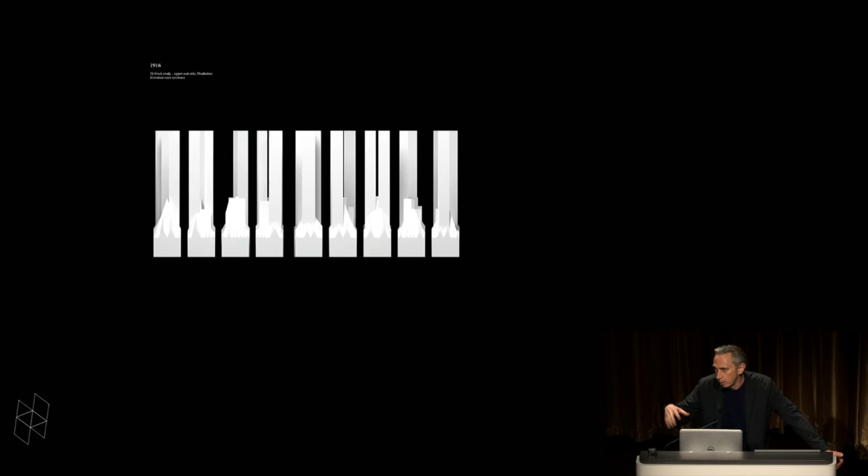In launching the Office for Urbanization, our mandate is to pursue applied design research projects with respect to questions of contemporary urbanization. And in so doing, it strikes us that there are really two primary questions.

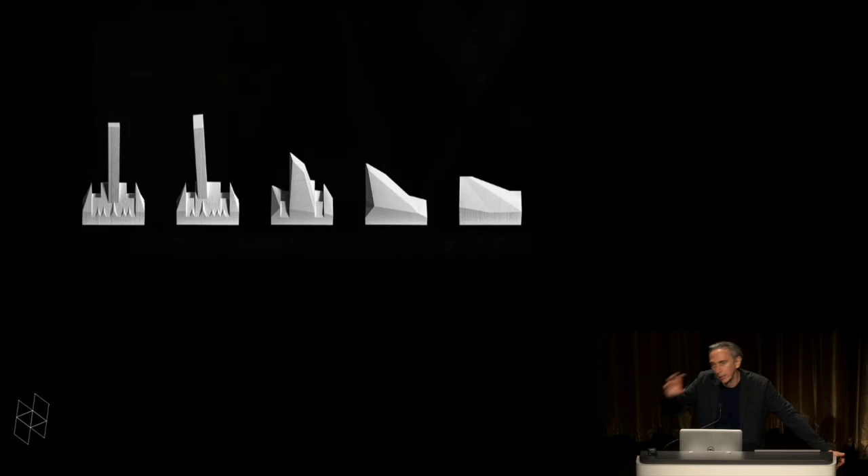The first of those is the status of design research in the context of a research university. What is the modality of design work that we do? How can that constitute research as such?

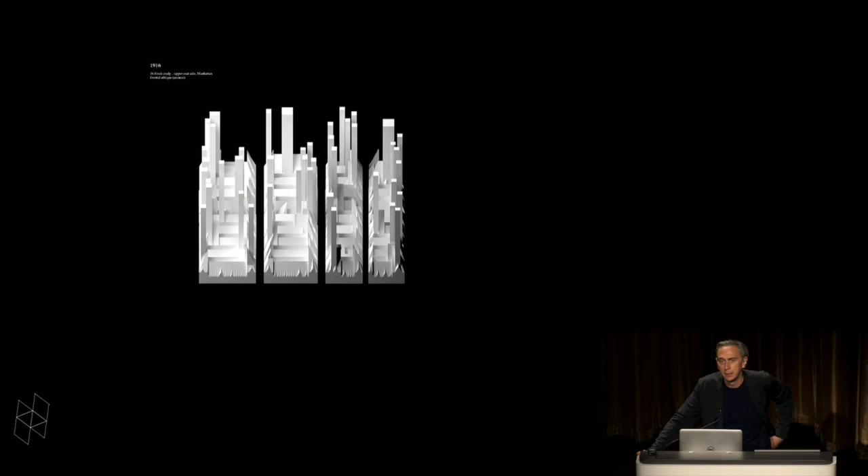The second question for us really has more to do with the status of the urban question. What's the status of the project of the city today? Our working hypothesis for now is that most often in conversations of the city today, we see two very discrete discourses. On the one hand, there's a conversation about policy, regulatory environments, elected governance, decision-making, data, a whole range of other things which are vitally important.

But that seems quite distinct and often quite separate from another discourse evident coming out of design culture, in which almost every urban project is a singularity. It's a particular site, it's a particular program, there is one developer, there is an architect attached, and everything distills down to an immediate question.

Are you for the Olympics or against it? Are you for the football stadium? Or what about the rail yards? What about this particular driver?

And of course, the media is deployed in both of those discourses in a variety of ways, not to mention our own scholarly and professional journals and the like.

And so in that space, one mandate for the office that we've taken up is to provide a venue for a conversation or set of conversations about the city as a collective act, the shape of the city as collective form, and in that regard, looking also to always reconnect questions of policy and governance on the one hand to questions of form making and design culture on the other.

It's that thinking that led us to this topic of heliomorphism. It's my general modus operandi, if you know me and my work in research, to find a topic that I think might be productive for the next couple of years that I don't know a lot about, and then find the smartest people that know more about it than I do and invite them to a party and say, okay, tell me about this thing.

And so by the end of these two days, I hope to know enough about this to be able to say something intelligent about it.

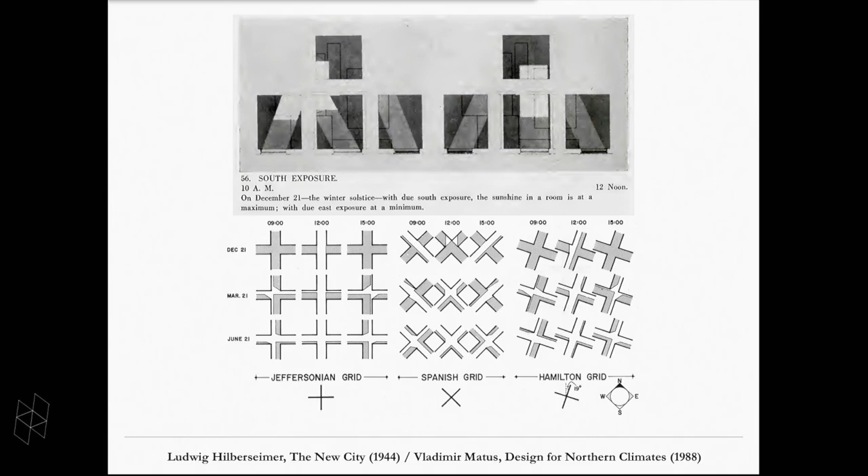In order to look at this, we've planned three panels, or sets of conversations, around three topics. I would like to briefly present them to you now.

The first one is Plugins. As it says in the program—I'm going to read this—Ralph Knowles' concept of the solar envelope proposed a design tool that anticipates contemporary interests in parametricism and relational modeling. The envelope offered a projective form through which urban morphology was indexed to solar performance. The technological developments of the last decade have enabled an unanticipated degree of precision and feedback, potentially infusing new possibilities into an idea with half a century of history.

Plugins revisits these changes, conceptual and projective, that contemporary models of computational geometry have brought to this design model. The beginning of these ideas from Ralph Knowles takes form in his book Energy and Form, 1974, written immediately after the energy crisis of 1973, where he talks about ideas behind solar exposure and its connection to energy production and consumption. The expression 'solar envelope' had not yet been formulated or used, but the ideas behind it are already present in the book.

The first time that the expression 'solar envelope' actually takes place is in this report to the Department of Energy that was written with Richard Berry, Solar Envelope Concepts, 1980. It's kind of amazing to realize that this idea of the solar envelope is only 35, 36 years old. One would imagine that this would have been in our disciplinary discussions for much longer, but it's not that old, actually.

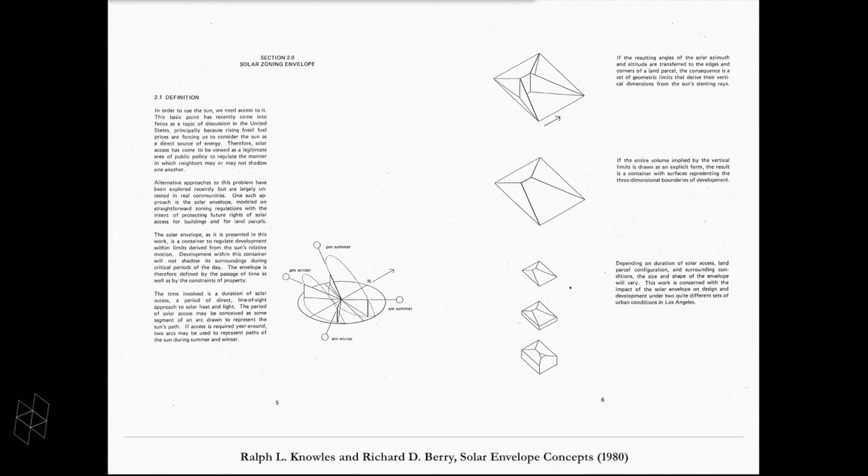And so if we were to construct a chronology of equations or expressions that have had an enormous impact in the definition of the urban fabric—and this is actually, don't steal this idea because I'm working on this project right now—there would be a set of formulations that have had widespread impact in the construction of cities. We would have, for example, the Manning formula that regulates the flow of water in an open channel.

This is basically the formula that has been used to design all drainage systems in most cities, and this formula is actually at the core of some of the serious flooding problems we're experiencing, because it has really helped us design channels in ways that move the water very, very quickly.

We could also include the formulas of FAR and coverage, as they were introduced in the New York zoning regulations of 1961, and how much they changed New York City from 1916 to 1961. And within this history, a place for the solar envelope construction of 1980 would need to have a place.

Arguably, it hasn't had the same amount of impact as other formulations, as other expressions have had in the construction of the city, but it does have the same amount of potential in defining the whole construction of the city fabric.

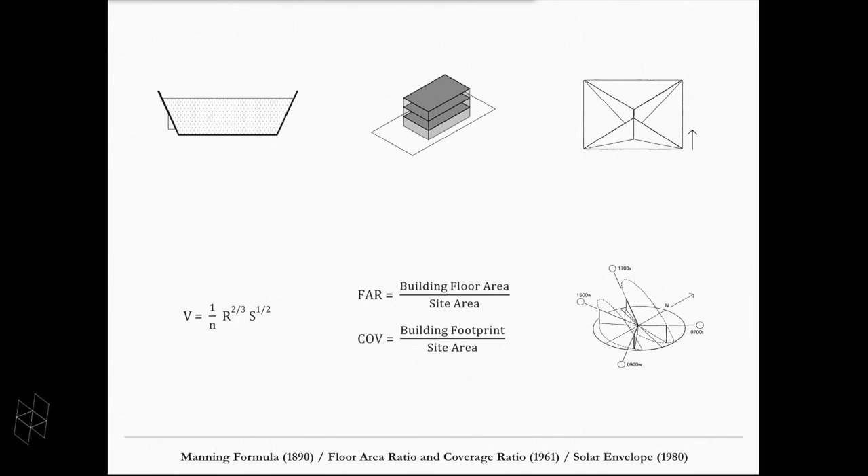We tend to say that some mathematical equations are beautiful because they incorporate different physical processes that seem to be independent, and they seem to coalesce in a single expression. And the solar envelope has that beauty within it. It talks about issues of policy, form, density, cohesion, and it all comes together in a single geometric construction.

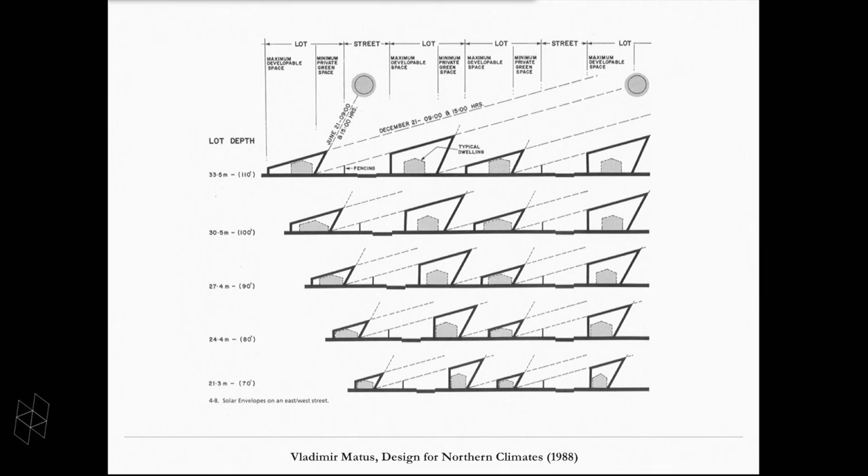In schools of design, we're both attracted to and we reject—we have an aversion towards determinism. And the solar envelope has this kind of love-hate attraction. We see it as something that has the possibility of being enormously productive, but at the same time, we are a little bit afraid of its potentially deterministic qualities.

Although, as we can see in this case, the flexibility that exists within the solar envelope is always very, very high. These kinds of formulations have been taken by many different people, exploring new efficiencies in the organization of urban fabrics in relation to solar exposure.

MVRDV has done this quite a bit, and obviously the use of computational tools—in this case Honeybee and Ladybug, the plugins for Grasshopper—have had enormous impact. So the question of the conversation today is definitely not the same as it could have been 10 or 15 years ago in our understanding of the possibilities that the solar envelope or solar exposure in relation to built form has. We expect that the panel, the conversations, the presentations today around this issue will start to illuminate some of this.

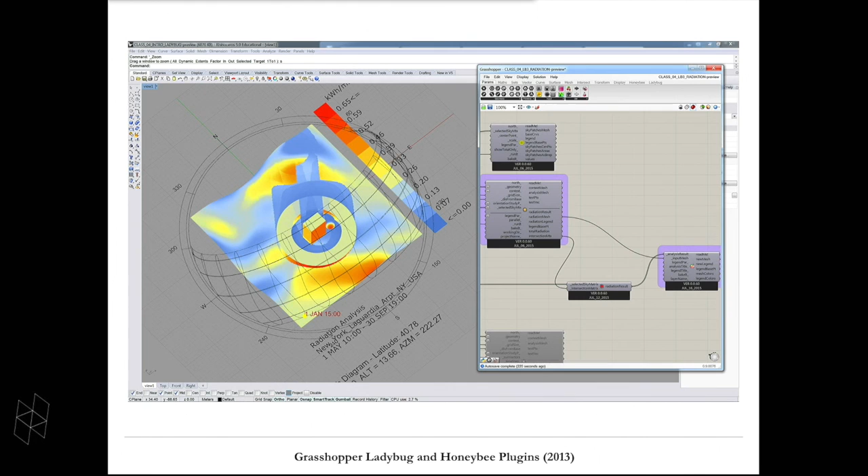The second panel that we're going to be talking about is called Commons. So independent of location or latitude, access to the sun is considered an ancient and individual right in many cultures. Several current politico-economic conceptions, however, protect it for health considerations, while others regulate it for energy reasons.

Regardless of these two distinctions, Commons reconsiders both types of solar access to be issues of social equity, and it examines accordingly the tensions that exist between built form through capital accumulation and access to sunlight through environmental consensus.

This is something that Carles explained quite well yesterday in that very nice axis, and today we will be talking about this. The New York Zoning Resolution of 1916 and its according image by Hugh Ferriss in the Metropolis of Tomorrow shows a tension between access to light and capital accumulation.

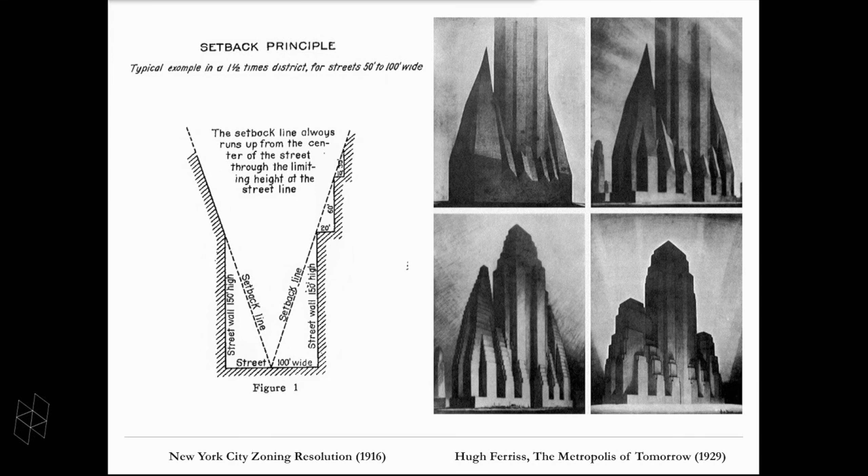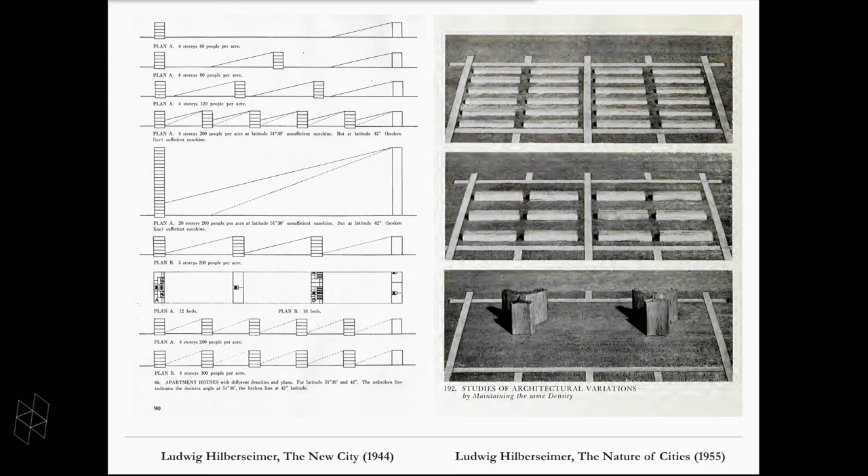We could again talk about Hilberseimer's first studies about the relationship between solar exposure and density of the fabric, and the drawings he did a few years later for the Nature of Cities, in which he starts to look at how the same density can be maintained with different built form. This kind of study was later taken on by other modernist architects like Gropius and so on.

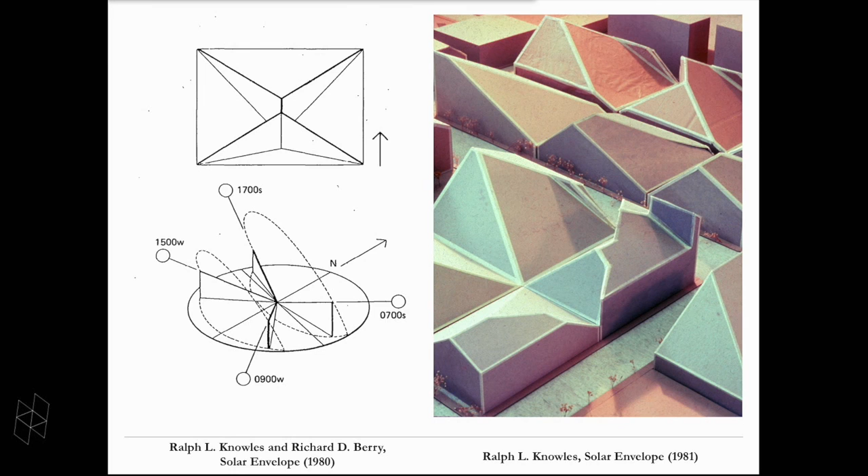Or we could look, obviously, at the solar envelope and Ralph Knowles, where the relationship between built form and solar exposure is not due to capital accumulation necessarily, not due to health implications also. It is related to both of these, but it's primarily related to energy consumption and potential production. And so in this case, we have these three images that explain a different relationship between solar exposure and its negotiation with capital accumulation, health, and energy production.

And we expect that the presentations today in the panel will move between, around, and overlap these tensions and others that maybe have not been as solidified as this.

I think it's important to bring into the context here that Ralph Knowles was already aware of the policy implications and the medium through which the solar envelope could be enabled. In an article in 1977 in JAE, he talks about solar energy, building, and the law.

He says: where their paths cross today, architects and lawyers can often be heard discussing solar energy. The popularity of this topic lies in a complex background of recent and historical events. The emerging fact is that anybody seriously concerned with future policies and designs governing building must consider solar energy as a way to temper the constructed environment.

The policy implications of this emerging fact have been seriously discussed in legal terms by a growing number of experts who agree that two basic questions must be answered. First, who will make allocations of sunlight between competing users? Second, on what legal principles will this allocation be made?

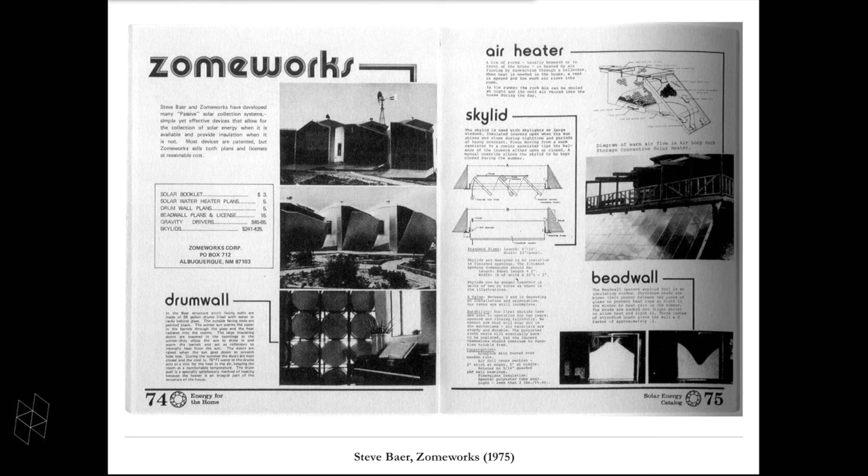It's do-it-yourself. It's alternative. It's not supported by policy, not institutionalized. There's no money. But this kind of same mentality has shifted or has been brought up to a different kind of context in the past few years. And so now we have the new normal.

This kind of mentality is fully backed by political research institutions. There's money, there's large teams taking care of this. It's no longer a do-it-yourself mentality. Maybe Masdar City, by Foster Partners, embraces this kind of mentality at this new scale.

It's unclear what this project is going to turn out to be, as its ambitions were put on hold. As one of the design managers mentioned, we are not going to try to shoehorn renewable energy into the city just to justify a definition created within a boundary. As of today, it's not a net zero future, it's about 50%.

So they've really readjusted, but there's still this ambition that exists. Within this context, it's interesting to see how the city continues to be explained as this collection of gadgets. The mentality is the same, the way of explaining things is the same, but the environment within these discussions has completely shifted from the home to the whole city. So the project has been politicized, but one could argue it has not yet been fully theorized, or that it's still missing appropriate theoretical frameworks to talk about these issues at the scale of the city.

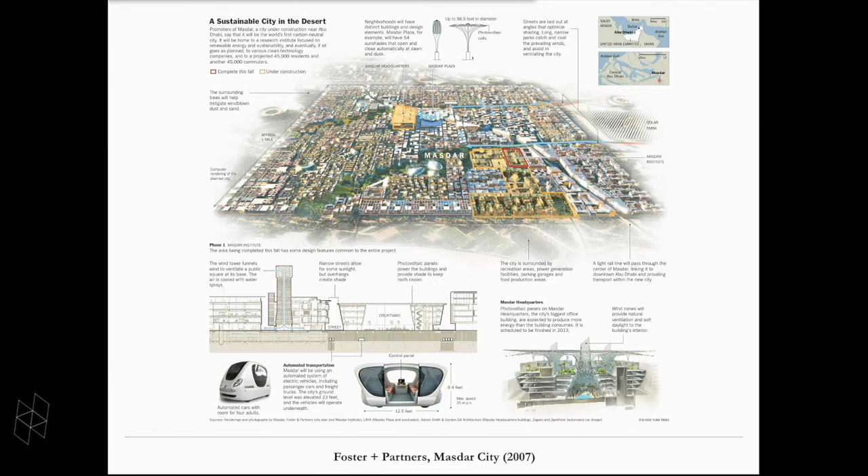So these are the three panel sets of discussions we're going to have today. In between, there will be several presentations by Mariana, Eric Heller, and Scott Cohen, finally with Iñaki Ábalos, that will talk about projects overlapping all of these issues and others not specifically mentioned. We'll start with Mariana's presentation, and then we'll have plugins with Andrew Witt, Holly Samuelson, Andres Sevtsuk, and Silvia Benedito. It will be hosted by Florian Idenburg.

Each of the cones is a cell that can be charged individually, but as the ball rolls around, each panel gets exposed to the sun and charged individually. Still, in a second, you're going to see how the behavior of the whole piece is actually networked.

So as the day goes by, and depending on the amount of interaction between the ball and a user, the cones might all get charged equally or not. So it doesn't mean that when night comes, this whole thing will glow as a sphere, but somehow it will register the type of interactions and the translations of those interactions into energy that the piece had.

So the resulting pattern or light configuration is literally a reflection of that, and it changes every day, and it changes with every interaction. And in this case, we have the input from the sun, the input from the user, and the piece that mediates and creates somehow a response to those two things.

Just a quick intro before I start talking about the Philadelphia Mask: we do a lot of urban projects that so far are all self-generated, not necessarily funded. In a similar way, we think about topics we're interested in investigating and create a framework.

We've been choosing cities around the world, and the first one we did was the Philadelphia Mask, in which, compared to the previous project, the idea of input and output is more explicitly addressed. It's a multi-agent plan for the city of Philadelphia.

The first thing we noticed when we started going there was the enormous amount of vacant lots, not only large in number but widely distributed throughout the city regardless of real estate value. So we were interested in researching how we cognitively map our environment, how we perceive location via references, and we wanted these lots to become those references.

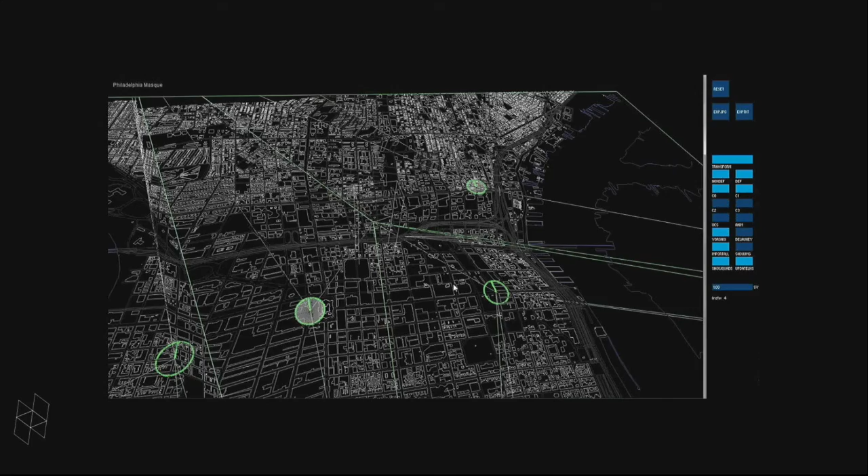We're not saying this is how we're going to transform Philadelphia, but it's mainly a test of this kind of relational model that sometimes is visible and has physicality, and sometimes is invisible and responds to emergent conditions. Eventually, we feel this could actually generate a new physical reality for Philadelphia.

Each one of these characters is given a name and assigned a formal logic — it could be monolithic, striated, linear — a medium of expression like light or sound. We also work a lot with kinetics, and a condition that they respond to: population density, traffic patterns, distance to buildings, or, for one of them, the sun.

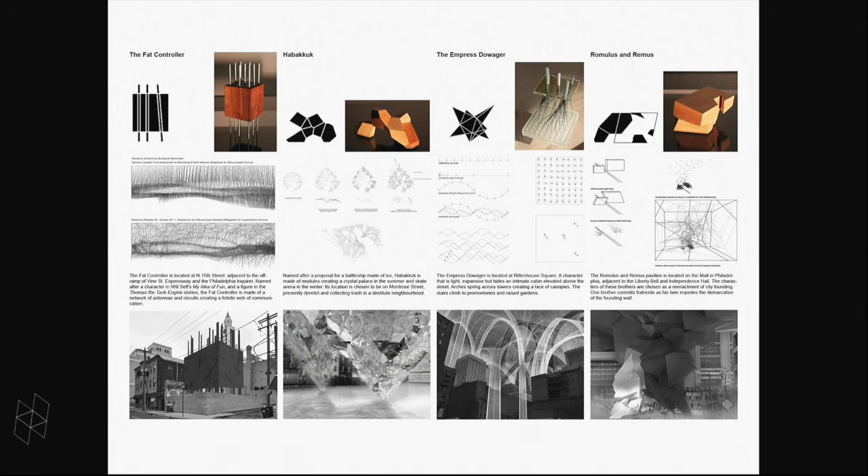Each character is also assigned a fiducial marker used to track its position and relationship to other characters. What you see at the bottom, part of the earlier video, demonstrates the tracking system that translates the analog condition into the digital realm.

So again, this constant transformation allows us to connect the physical world with the digital world. They're not one a representation of the other, but within both, many decisions are being made.

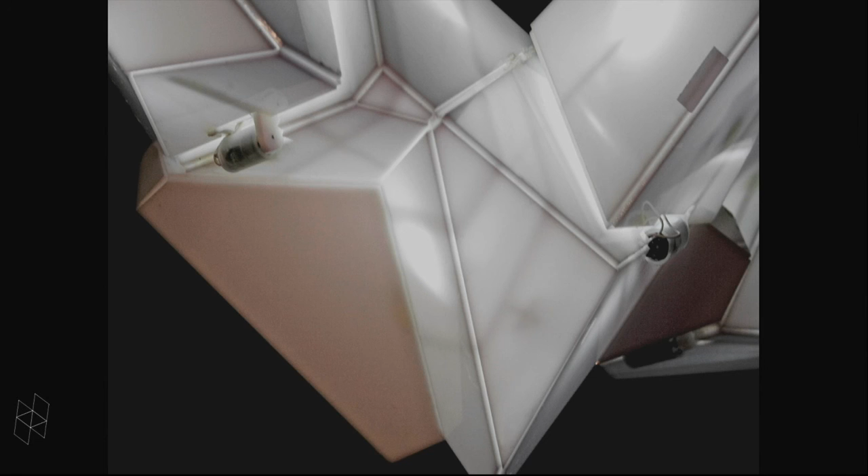This is just focusing on one of the characters — the one with kinetic properties. The prototype is part of a larger investigation into the reconfiguration of solid figures using the principle of a hinge dissection.

A rectangular volume is dissected and unpacked to accommodate four rotations that shift the adjacencies of the parts, creating the overall effects the piece produces at different stages in the transformation. That was really an intro to this prototype, which is part of our submission for the PS1 competition we got to participate in, organized by MoMA in 2011.

We used the same principle of hinge dissection, in this case at two scales, to develop the plan and design the proposed structure. The Mechanical Garden was the name of the project, using the principle of a hinge dissection to transform the triangular patio of PS1, shown on the left, into a courtyard.

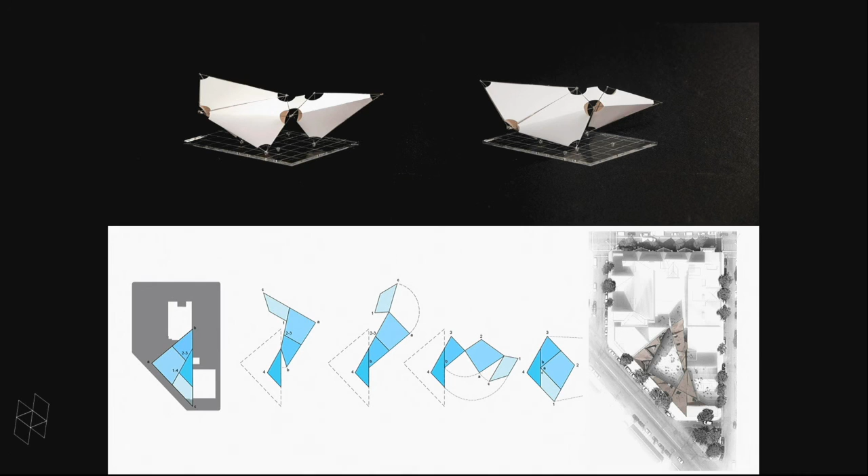The idea behind that was that we were interested in what we call the spectacle of urban life, or the life that happens between the center and the perimeter. We wanted a courtyard and a colonnade, basically the most basic urban organization you can find, but we wanted to actualize that through the properties of the material that defines it.

Shade is very important in the MoMA brief—the first thing they tell you, because this space is used throughout the day and gets very hot in summer, is that you cannot use string since string does not provide shade, and that it needs to host people throughout the day. So the courtyard has no shade at all, no trees, and no artificial structures to produce shade.

So we decided to incorporate the sun into the narrative of the project. Using the device of the character as a means to differentiate each structural unit from one another, we created 9 characters. 8 are actually physical and make up the colonnade, and I'll describe them in a minute. The 9th character is the gray triangle you see in that diagram, defined by 2 extremes of the dissection.

It was basically a geometrical process to find that triangle. But our decision was that that would be the 9th character, and that character would have 2 characteristics: it would be a void, and it would never be in shade. So it's actually the only point in the courtyard that has sunlight all the time.

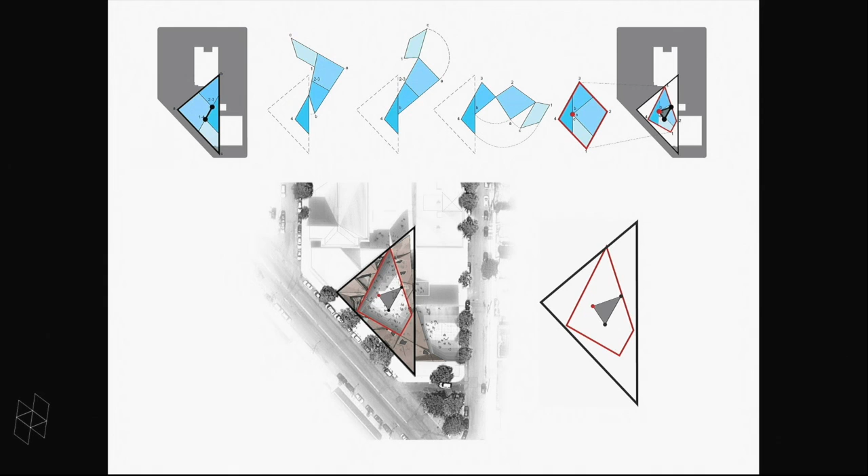So basically, we designed all of the structures around it to respond to program and circulation, and obviously some aesthetic preferences, structural needs, et cetera. But also formally, they were iteratively tested such that that center space, which we consider one of the core elements of the project, was always in light.

The units are resolved through a collection of tetrahedrons that combine in various ways to create tree-like structures. The idea is that the base model is repeated and modified to create a wide range of options for seating and canopy, so the units don't repeat, but they're always variations of one another.

We built this one-to-one prototype that was actually kinetic, to test structure, formal plasticity, and material definition. So with one base form, basically, many configurations can be achieved.

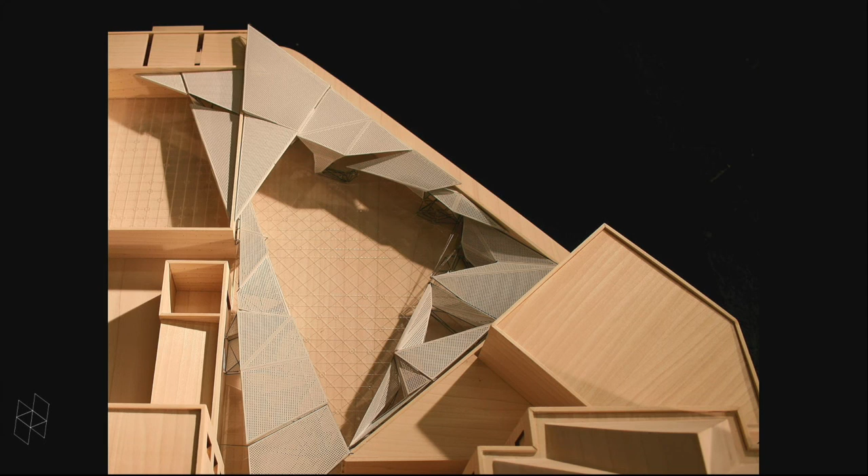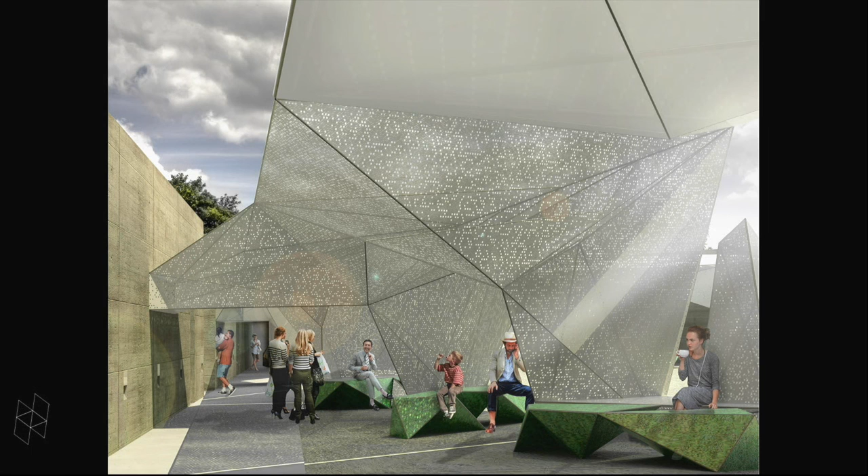The sun moves through the day and through the summer months, and the canopy is designed, amongst other things, to keep the 9th character, as I said, as a center of light. The courtyard is used as a public space during the day and for parties during the night.

Now, this is kind of a dramatic switch, going more into the technological part of my argument and behaviors. Just a short detour to introduce these devices that will be important in a minute.

We work a lot with Mark Yim, who's the director of the Modular Robotics Lab at the University of Pennsylvania. He's a longtime collaborator and the mastermind behind these robots, and these are the types of things those robots can do.

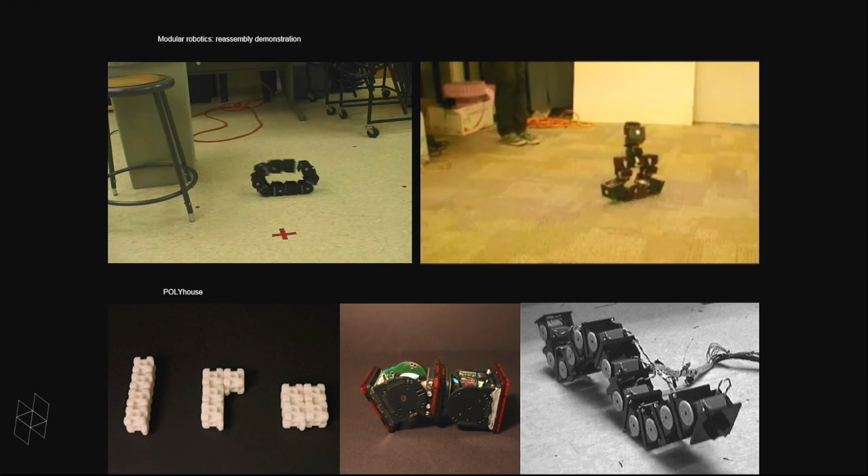We use these devices in many projects at different scales, mainly for installations and prototypes. They temporarily allow us to test ideas that are difficult to implement on an architectural scale, but it's still central to our work to speculate about what that architecture could be like. We're developing a prototype for this project in the spring, so stay tuned.

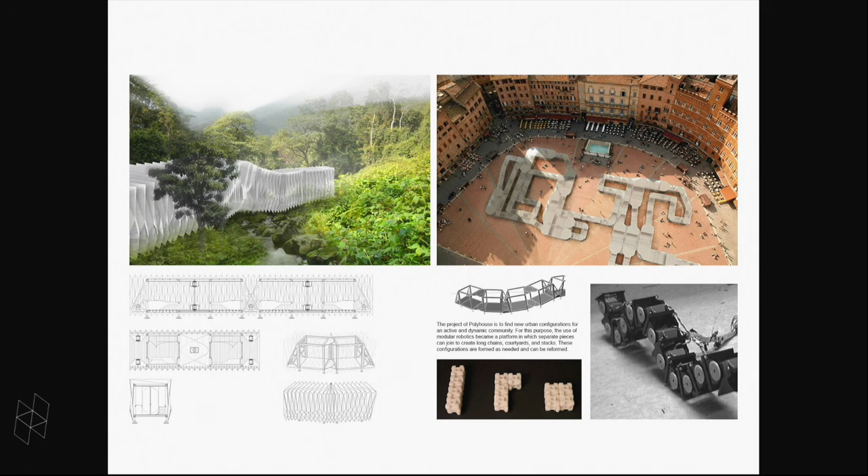This is Polyhouse, a project that uses these modular robots to create a deployable system to provide temporary adaptive shelter units. The idea is that adaptation responds to various environmental conditions like terrain, weather, proximity, density, relationship to other structures, et cetera. So, hopefully that will work.

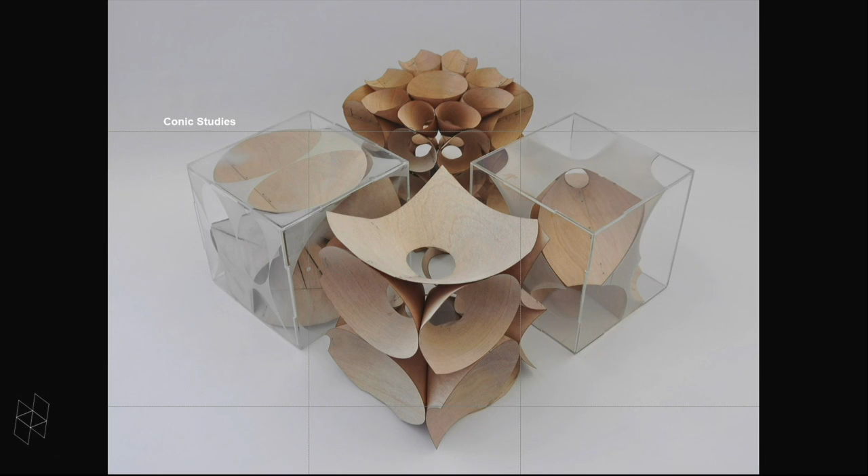The next project is part of a series—this image is just to introduce a series of projects that use conic sections and their aggregations as a formal strategy. It has generated several projects over the past maybe 2 or 3 years that use cones, conic sections, arches, vaults, domes, et cetera.

I'm only showing this one, which I think is a little more relevant to the conference topic: a project we did for the Play Day event that takes place in the summer near the Seaport District in Boston. It's an interactive installation that connects material effects with performance.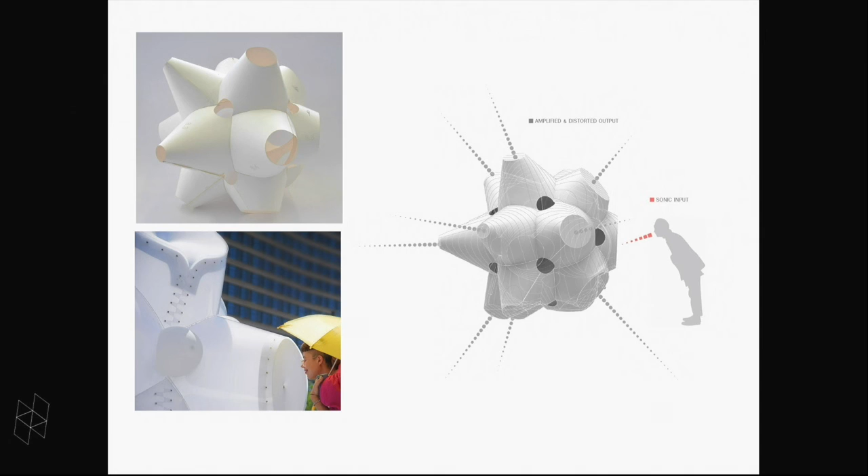A series of cones are aggregated to produce a closed solid, and we installed microphones, speakers, and LEDs embedded within the structure. Visitors speak their secrets, thoughts, or messages into these cones, and the messages get amplified and distorted, become anonymous, and are shared with a larger crowd.

So in this case, during the day, sound was the medium of expression to augment the physical project, but at night there were two modes, recording and speaking, that echoed a two-tone variation that went from blue to magenta. Again, the connection between a material effect and a behavior.

The next project takes a bit of this idea of these pavilions, but is connected somehow to the Philly Mass project I showed, in its attempt to have architectural interventions produce urban transformations. The project begins with Ellicott's 1792 plan, a derivation from the original plan designed by L'Enfant, where a rectangular grid interrupted by diagonal boulevards was introduced to link DC's spaces of power.

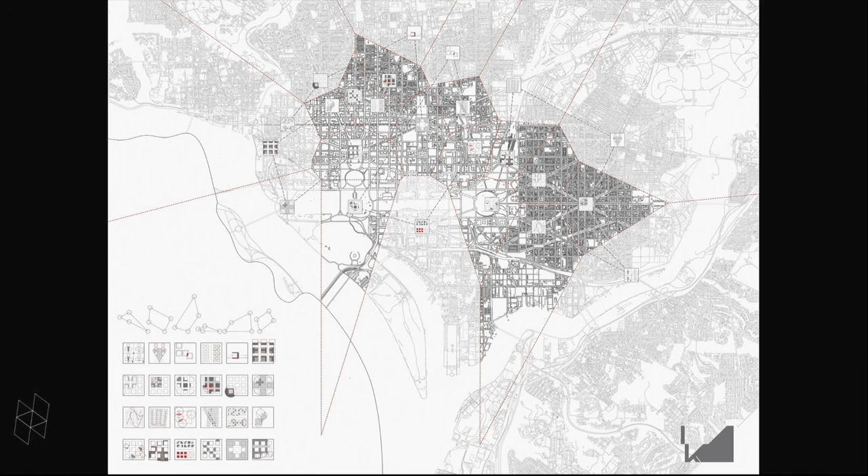Our project disrupts these boulevards and the connections they're meant to establish by transforming them through the pressure of architectural agents—again, another multi-agent system—and the relationships they have with the environment. While they operate autonomously, they have the capacity to produce global change.

We produce a lot of these kinds of documents trying to graphically understand the computational underpinnings and the behaviors we want to program into the agents, and also because this is usually what we share with other architects. So these are graphic rules—what you see on the screen represents the logic of the computer programming.

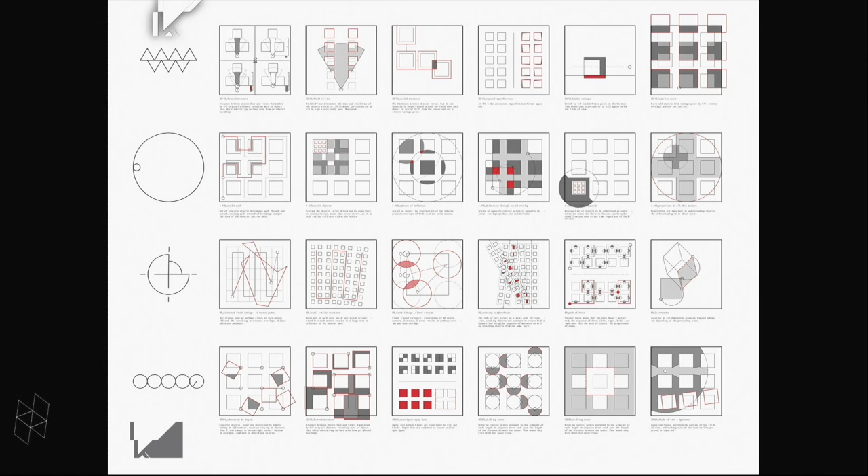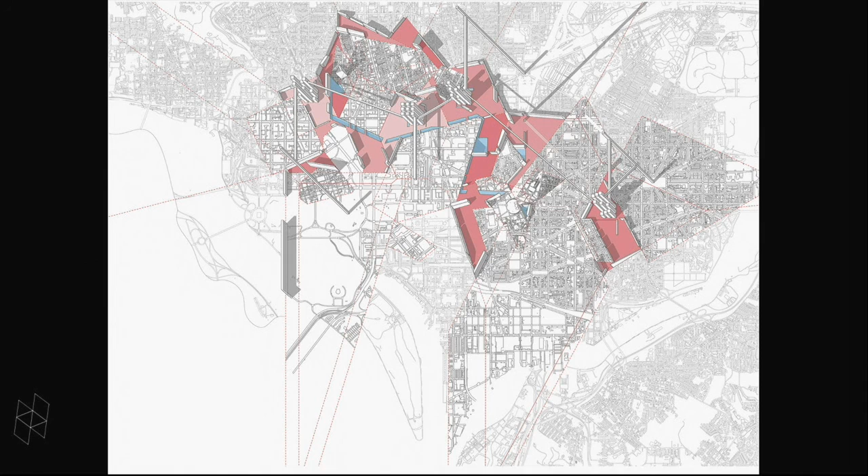As agents, they don't really have a scale. They have behaviors and relationships to sets of hypothetical context conditions. The initial effect of the transformation is this breaking apart of the plan of the city to become re-articulated through the insertion of new structures and infrastructures for the production of public space and a new form of order.

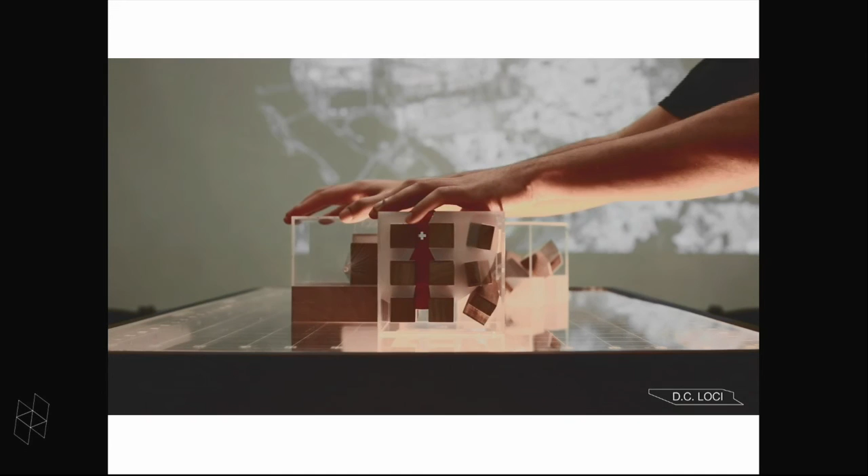In this case, we produced this prototype that was a study of the exchange between individual and global phenomena. So again, we create these kinds of devices to transform physical information into a type of digital environment and language.

The next project I'm including is an example of how we operate across scales. This eventually becomes a city, and it's based on the relationship between body and space—how we imagine small-scale devices present architectural opportunity.

In this scenario, we developed a robotic wearable prototype for a pilot project with Opera Philadelphia. They came to us because they were concerned about the future of the genre and the loss of audience, and they wanted to test ideas.

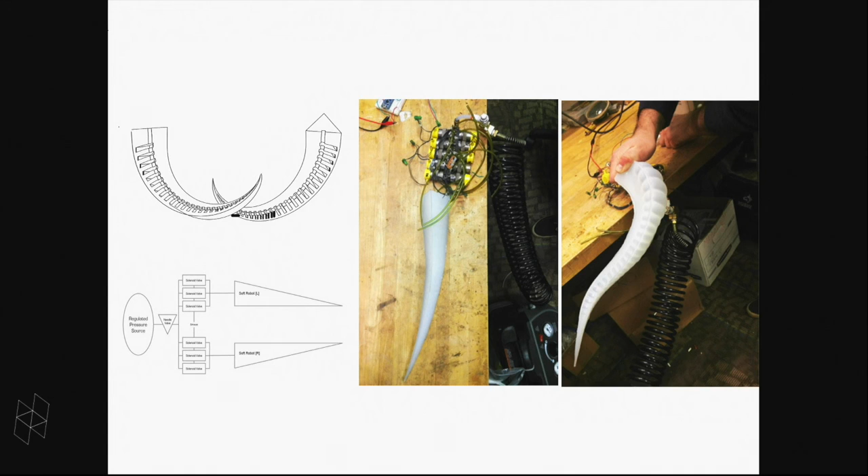So we did a first project where we staged Orpheus and Eurydice, and we created this prototype, which is the serpent that kills Eurydice. This is a soft robotics snake—a collection of fixed geometry modules with air pockets that, with a single arm using pneumatic air inflation, can move.

I'll just show a short video. The resulting motion basically creates this very supple and organic movement that is flexible.

She did not get killed.

So anyways, this is a compliant mechanism. We've been testing compliant mechanisms a lot in the past few years, and it can deform, elongate, flatten, or inflate to different scenarios—basically allowing for environment-ready adaptations. So again, we immediately try to imagine the architectural implications of these ideas and devices.

In this case, we imagine that we can proliferate them and create a field, aggregating them to produce a closed environment. We produced that animation, which we call a heliotropic test, where the units were responsive to a light source moving through—in this case it was artificial, but now it's got me thinking about something else.

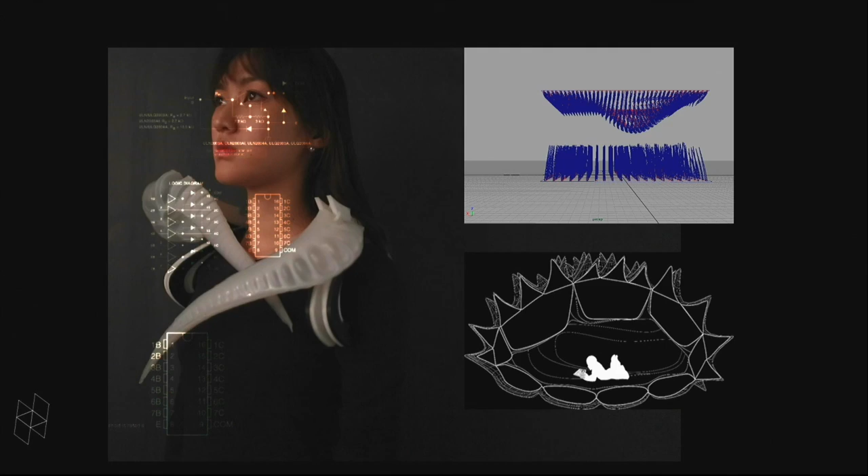In this project, nothing is plugged in, really, but I wanted to show it as a reference to my original statement about the static versus dynamic relationships.

In this case, the context is completely static. But in the second stage, we incorporated interactive technology, and now the unit is part of a network of units connected to one another. It's not only the actions of the occupation that condition the interaction, but the position of the units and their relationship to the immediate context.

So again, in this case our context was fairly static. This happened in an indoor, fairly controlled space, but the piece itself basically transformed its relationship to it.

Nancy and Sputnik are the result of a competition we won last year to produce an installation in Calgary during the Beakerhead Festival. I wanted to present this because it's another type of relational modeling in which multiple variables can be considered at different stages in the process, with a series of pieces installed both during daytime and nighttime, designed to be different and meaningful in both situations.

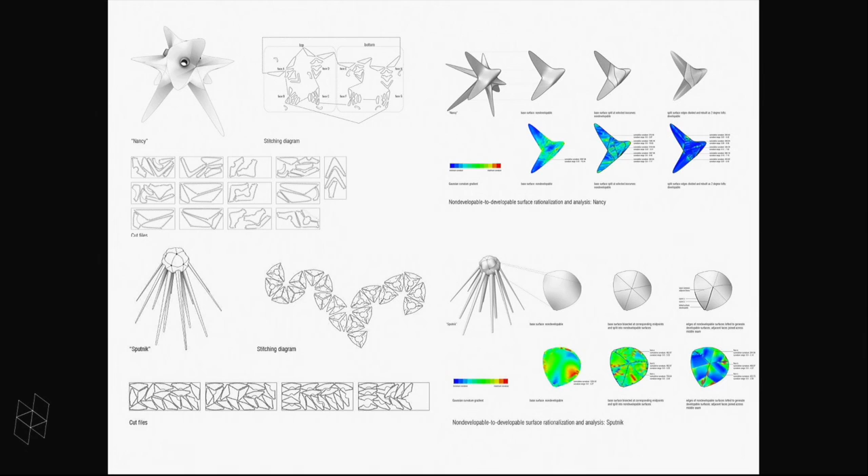As in all previous projects, materiality and effects are directly correlated for us, and I'd add assembly to those two. We use light as a material, both natural and artificial. The geometries we wanted to test required specific strategies for faceting and folding. Decisions about form and materiality provided the opportunity to use reflections in Sputnik, more meaningful during the day with reflections of the sun, and at night we had lights inside that created deep shades on the surface. Nancy was transparent, letting sunlight through during the day, but at night it became a source of light.

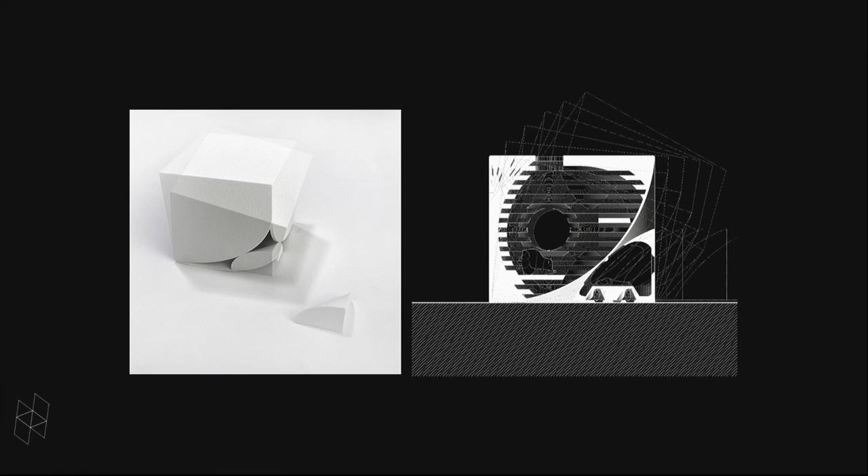This is the last project I'm going to show, so bear with me. It's under development, but I thought it was interesting to close with it. This project seeks to test mobility at the scale of both architecture and the city. It's called the Automotive, and it operates at three scales. I'll focus on the last one but go quickly through the other two.

The first scale is a small space, maybe a house or something like that. The second is a medium-sized building, at this point just placed in a generic, deployed-somewhere context. The last is an urban element made of smaller parts that need to be choreographed or able to maintain transformability simultaneously.

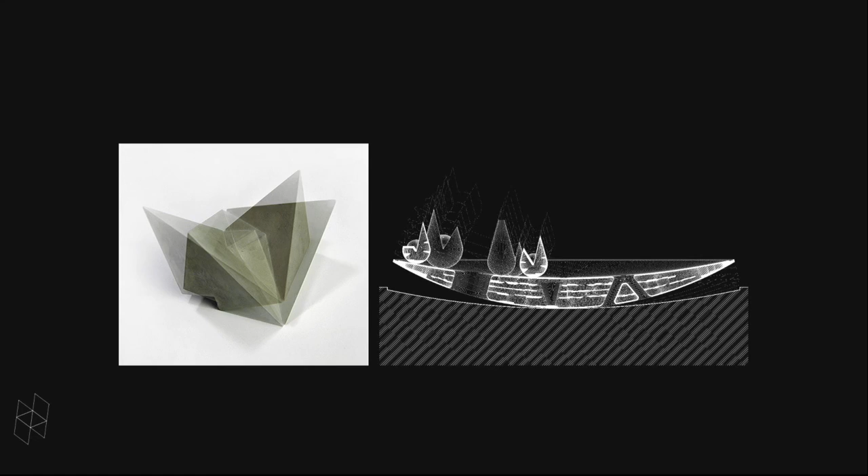So we have these units, and we created these concrete models to test individual and collective mobility particularly, but also other behavioral effects. We find ways to plug everything so we can test other inputs, and in this case we tested vibrations that we imagine could come either from the internal pieces or from the environment.

Sorry, I don't have my control. At the top I didn't want to put the sound because it's a little annoying, but basically you start seeing the pieces vibrate and how they change the context in which they're placed. In this case, it was a granular, sandy context. I don't know how long it's going to take, so I might not show it.

We created a tool to analyze at larger scales through aggregation how the behavior of the pieces was transforming the map around it. This is where we're at in terms of its urban application. It proposes a collection of elements that operate at different scales, articulated via behaviors that result from formal decisions and interactions amongst themselves and with the environment, in terms of orientation, rotation, and behavior.

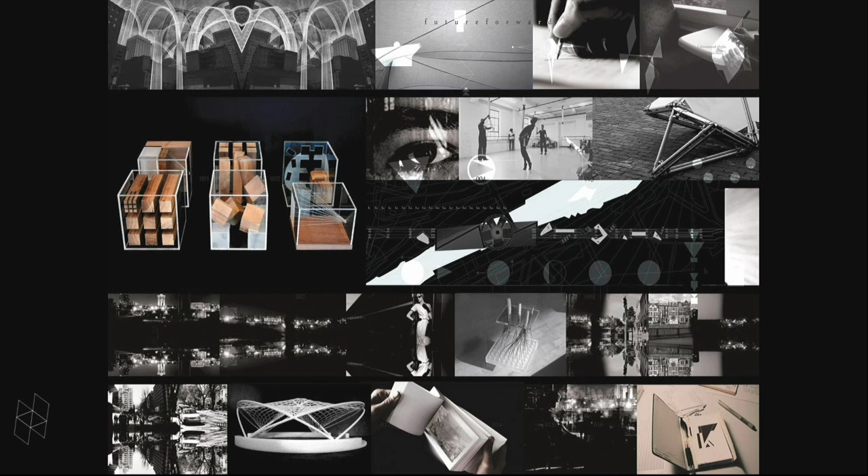This is my last slide, but I wanted to finish with a closing comment: this idea that when we design, environment, form, and effects are never just causes or consequences of a design act—they are active agents in the design process. This is where the idea of bewilderment, part of my lecture title, comes into play. It suggests an architecture of effects, and with these experimental projects, an idea of overwhelming of the senses that is systematized, not dissimilar to the aesthetic idea of sublimity. It works in logics of sensation and the deconstruction of meaning in objects.

So Lights On, what I prepared for today, takes this idea of heliomorphism and includes it into a broader set of variables that assign behavior and dynamic conditions both within the design process and sometimes to the architectural objects or urban propositions. It's an investigation of an active medium that we always try to take into the unknown so new territories can be found. Thank you.